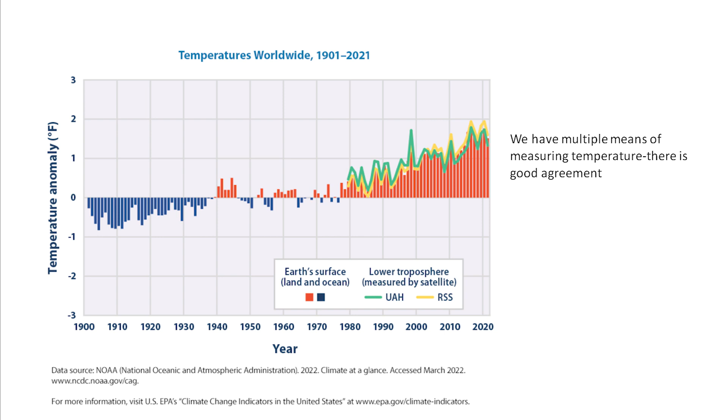Okay, now I'm going to cut out a lot of slides. But anyway, information that we have—this is one we all agree on. We know, and this has great agreement, what's happening to our land and ocean temperature. Pretty much every model, every type of measurement, gets that. This is really reliable information. Let's go to the next chart.

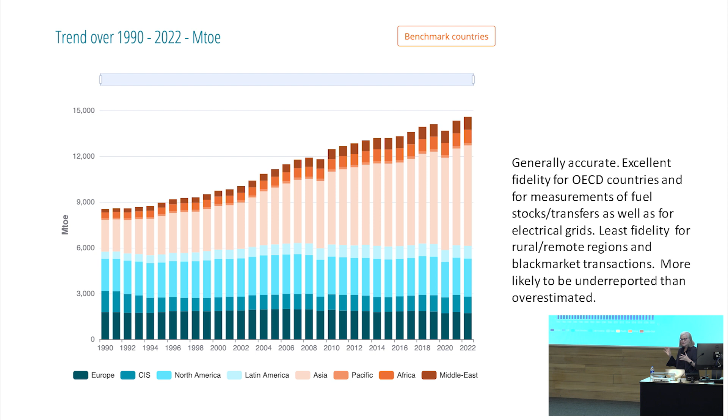This is a chart dealing with actual consumption throughout the world. If you look at it, you realize that in Europe and North America things are relatively flat, but there are stunning increases taking place in Asia, South Asia, and soon to be stunning increases in Africa as well. Pretty accurate in many respects, in terms of understanding where energy flows are—not so great when dealing with areas of the world where we don't have good records, where there are black market transactions, or areas that are rural and remote. But on the whole, we kind of get this type of thing. So what we do know is relatively accurate, but probably underreported.

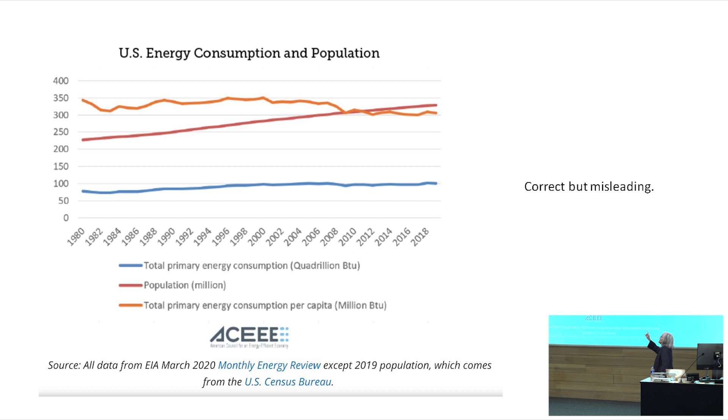But are we really doing something right? Actually, no, we are not. Something right is happening, but it isn't because we're actually reducing the energy we use, even insofar as that measurement shows that. Let me show you why.

It isn't because of the way we're designing buildings. It isn't because of the way we're rethinking the automotive industry. It isn't because of any of those aspects. It is simply that the fuel mix has changed. And yet pretty much every country, this country included, is talking about how well we've been doing—population's going up, but our energy use is not, so we're making big strides. We're not making strides on our end of things. It really is entirely due to this dramatic shift from coal to natural gas.

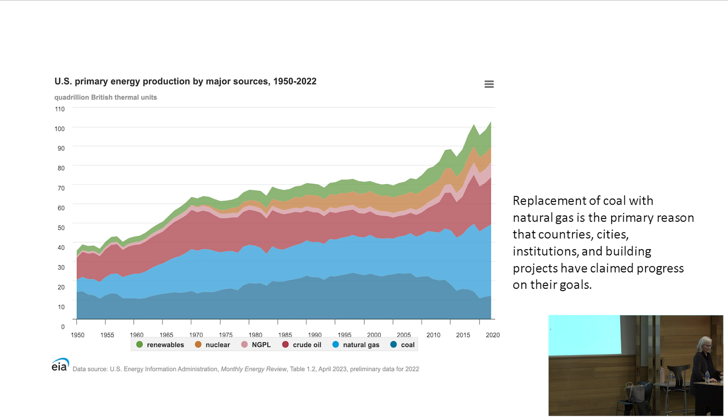A key takeaway is that these improvements are due to fuel mix. The problem we have to worry about is that economies in transition—particularly China, India, and many countries in Africa—are coal-based. So it's actually going to get much worse before things get better. They're not going to have the chance to make the switch to natural gas the way we have in Europe and the US right now.

Another aspect: a study done around 2005 looked at what we've done in building design that's really made a difference. The Department of Energy did an exhaustive study of all their initiatives to see which ones, over their entire lifespan, made a significant difference in the amount of energy used in buildings—$2 billion worth of energy research. They could only find 3 things that made a difference.

The biggest thing—some of us may not remember how refrigerators used to behave, but there was a dramatic change in the design of compressors for refrigerators, leading to advanced refrigerators. You have to be pretty old to remember magnetic ballasts for fluorescent lighting; the switch from magnetic to electronic ballast made a big difference. The other thing, the only one related to building design itself, was going to low emissivity glass. None of the other initiatives showed that they made any difference—only these 3.

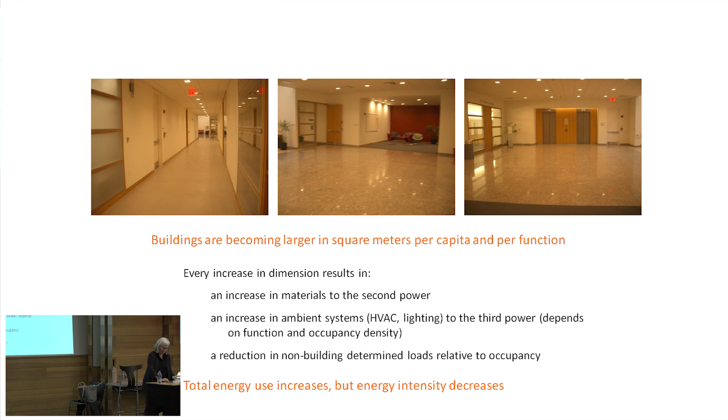This is something I've been talking about for nearly 30 years, every place I can, every part of the world I can. And all I can say is: tiny victories. Finally this year, the Intergovernmental Panel on Climate Change recommended that we change the metric for buildings from energy per square meter to energy per capita. Small move, but finally moving ourselves in the right direction, because we've been looking at the wrong number for years on this. So total energy use goes up, but energy intensity—the energy per square foot—has been decreasing, which has led us astray.

If we think about the fact that much of this kind of construction is also happening throughout the world—we saw with COVID a stemming of the tide, particularly residentially, of buildings getting larger in this country. It'll be very interesting to see with this shift in work arrangements, whether it's hybrid, work from home, whether that's going to have a major impact on our commercial buildings. But what's happening in the rest of the world is that it's building as fast as it can, and as it's building as fast as it can, it's also increasing the space per capita at some of the fastest rates we've ever seen.

I've been following rates in China. The first time I started talking about this, residentially it had gone from 4 square meters a person up to 20 square meters a person. In 2000, it was 26 square meters per person. By 2015, it was already up to 40.8 meters a person. Understand, 4 square meters to 40.8 square meters is a stunning increase.

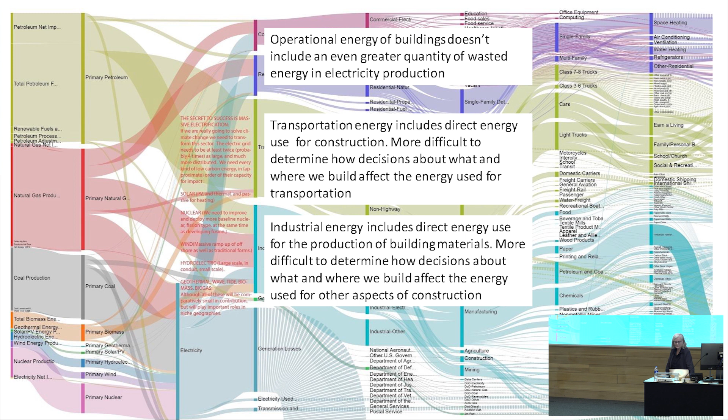And so there's something else that happens as a result of this, because we're only looking at the end parts of this. What do we know the best about in a building? By far we have the best accounting of - if we happen to have an oil-based water heater, a natural gas-based water heater, or a natural gas or oil boiler for heating, we have incredibly accurate information about those uses for space heating and water heating. It's by far the best information we have in the building.

Air conditioning, not so much. Air conditioning involves a myriad of other types of processes not part of our accounting system. But when it comes to heating water and heating of space, particularly if we're using a fossil fuel, we have that spot on. And as a result, we had a lot more focus on thinking about that.

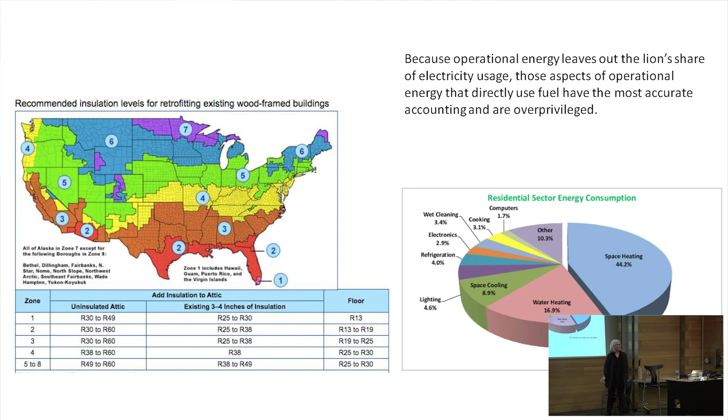So you can even look at this chart over here - space heating... it was just going to be that kind of night. Space heating 44%, water heating 17%, and space cooling 9%. And that includes what comes from lighting. That doesn't make any sense to us, but it makes sense according to our model. It doesn't make sense in terms of how we account for things.

Much of the space cooling aspects belong to another sector - it's not being dealt with right here. And the reason I included this particular graph here, this comes from the Department of Energy.

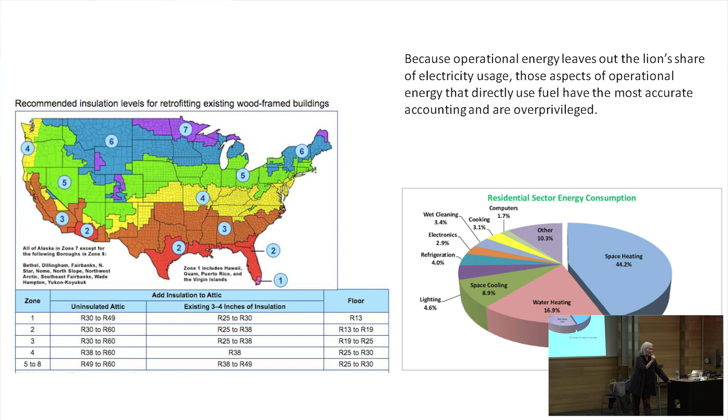It recommends what kind of insulation you should have. Because we've been so focused on thinking that our problem is heating, and insulation is the best way to deal with heating, we have dramatically increased the amount of insulation we expect in buildings. We now expect in Miami, Florida that they should have the same amount of insulation as we used to expect in Maine. Because as we're following what these numbers are, if we're following the fact that heating's the problem, our logic apparently is such that yes, we can improve the conditions in Miami if we just insulate it the same way we've been insulating for Maine.

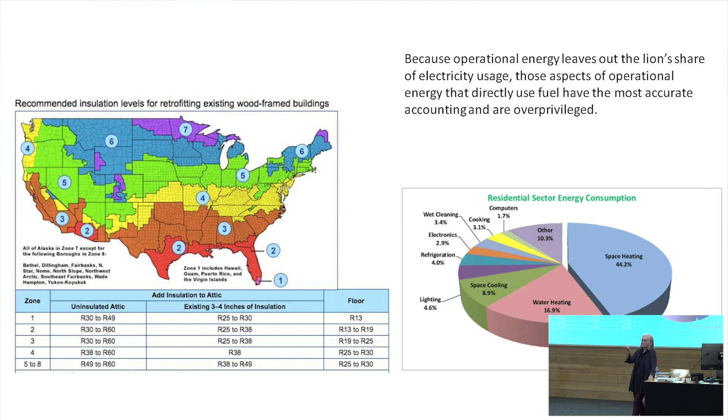We've continued to run down this path. So the next takeaway: codes, standards, and strategies have over-focused on space heating, which is, by the way, the easiest aspect to quantify. We know how to calculate space heating, we know how to account for water heating - we just don't account for the other things very well. And our big concern is not only is space cooling very underaccounted for, it's the area where we're seeing the most rapid growth worldwide - stunning growth in space cooling occurring worldwide.

When it comes to materials, embodied energy, for a long time those of us who worked in the building industry were told it doesn't really matter that much - operational energy is so much larger.

People started to become more and more concerned about embodied energy materials. We started to see software like Tally to help us understand how we dealt with embodied energy in buildings. We've had a lot of focus on working with mass timber in buildings, so there has been some discussion on it.

But it's still something that, in terms of understanding how the overall industry has been impacted by embodied energy, not so much. It was not until the IPCC report in 2014 that the Intergovernmental Panel on Climate Change, in all the years of doing these analyses that we all look to, first thought about embodied energy. So embodied energy shows up in that report, and it's also the first time they put in a chapter on urban settlements.

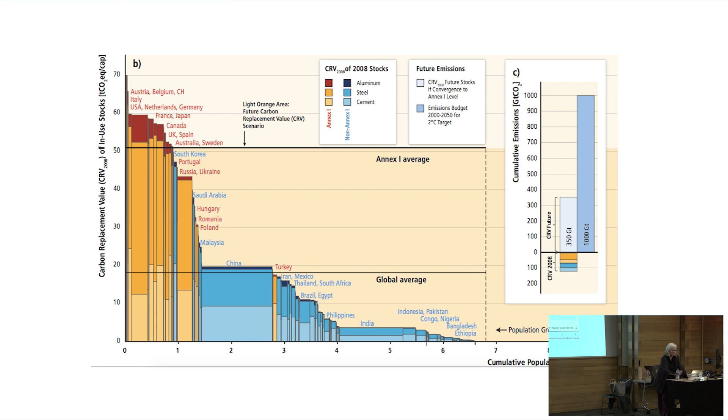What they found, and it's a little hard to read this graph so I'll just explain it, is that they've estimated the embodied energy of buildings and associated construction will be 30% of all carbon emissions by 2040 - the embodied energy. The thing we had neglected for years, what was minor, that we tweaked, that we thought about a little bit - 30%. Now they're thinking differently than we think.

They're thinking about this as an urban condition, which means they're not just thinking about the steel that goes into the structural system of the building. They're thinking about the fact that this building also needs to connect to the sewer system, that it's going to have an associated impact on our water distribution. They're thinking about all of the types of materials we need urbanistically in order to support building, which is the way we're going to have to start thinking about things.

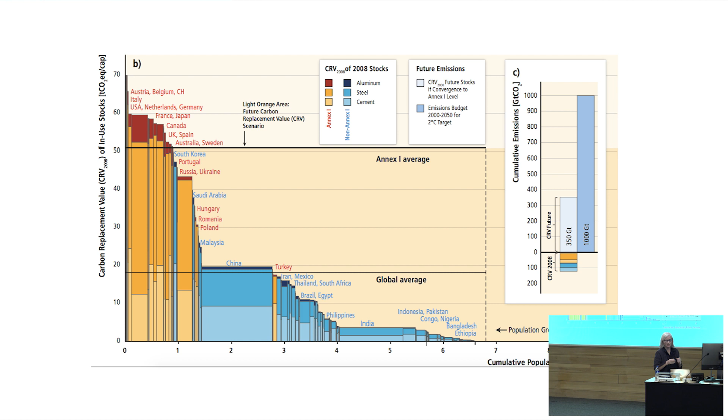We can't start truncating what it is that we do bit by bit and only counting for small parts of things. So key takeaway: while embodied energy for individual buildings and materials has entered our conversation, the much larger embodied energy of associated construction - all the things that come along with building - has not.

Again, the rapid growth and urbanization of the economies in transition are going to dramatically increase concrete usage. Concrete is the most common building material in the world, the one readiest to use. For all the talk about alternative materials, when we're looking at parts of the world trying to industrialize and develop rapidly, it's going to be concrete, which means this is going to get much, much worse.

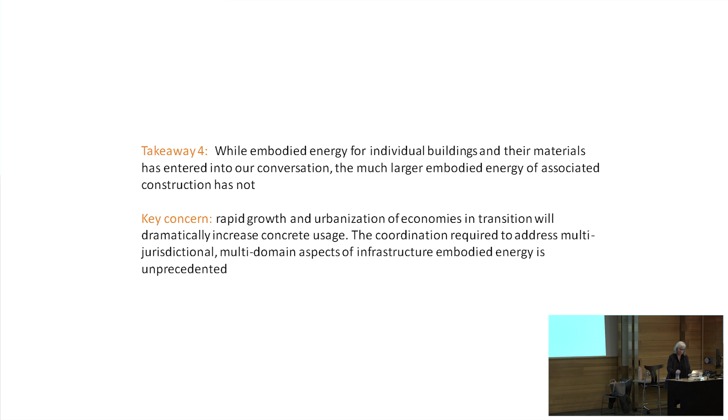Coming to the other aspect that shows up on this, and this one's not going to be popular - I don't know that anything I've said has been popular so far, but this one's really not going to be popular - it's the way that we think about the grid.

For way too long, we've been hyper-focused on things like net zero energy, carbon positive, a whole variety of things like that, where we feel as though as long as we use something that is renewable, or particularly something like photovoltaics, we can use that to erase the energy we're actually consuming. Basically, we are playing junior energy engineers, a building at a time, a bit at a time. I'm showing you here...

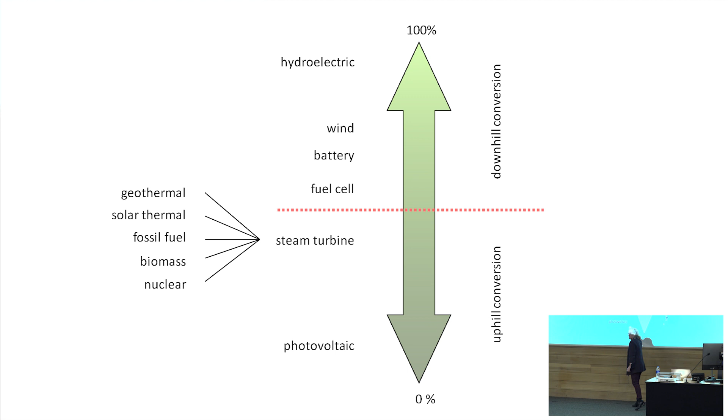We'd be better off if we could start thinking about maybe not making these decisions at a building level, but what if we could start thinking about this at a larger community level? What if we can begin to imagine how we might collectively be able to contribute to things? But as long as we want to make it at a building level, we're stuck with something that actually is probably doing more harm than good.

So the takeaway here: it's so poorly understood by most, and decisions at the building level by customers to add to the grid make little difference. Aging infrastructure, rapidly increasing demand, the net zero energy strategies have distracted us from tackling the most difficult issues and have allowed us to both neglect to focus on actual energy reduction as well as delay investment in the grid.

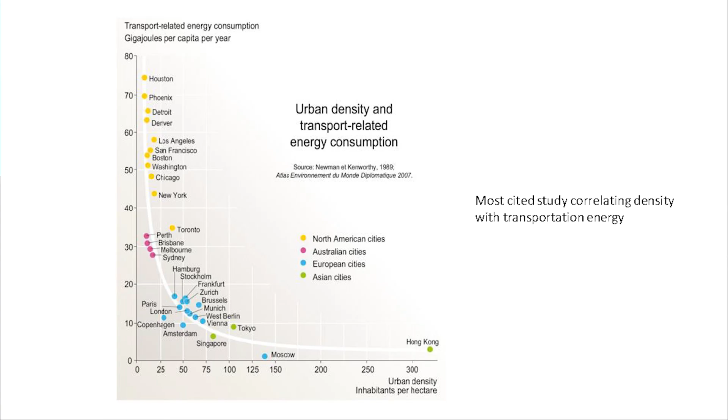So now for a couple of others—all that just comes from looking at the data that we're given. Now this is for some other unquestioned sources that have steered us a bit off course. First one being density. We're going to go to Hong Kong, and we look at Los Angeles right here. This particular paper that was written in the 80s, this image, is the most cited paper dealing with the relationship between density and transportation.

But this paper has been cited every time someone says we need to densify our cities. It's the most common metric, sort of target, directive, or initiative that we see within many types of cities.

Boston, it's been a big driver for many of the decisions being made. LA has been a driver for ADUs, accessory dwelling units. We see this occurring quite a bit.

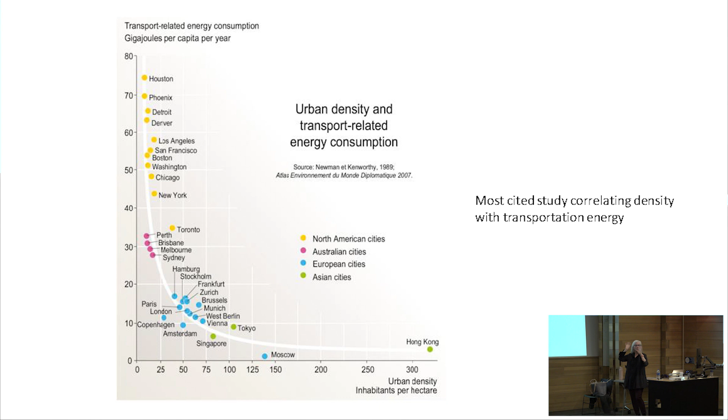So the idea is that if we could just have higher density, we're going to reduce energy. It went from being energy for transportation to energy in general. Part of it is that this is what we've heard for ages. We've all read Jane Jacobs. We've all sort of been concerned about suburbs. And so this fits within our mindset, the fact that higher density means people will live in a way that's less energy intensive.

We know sprawl is a pejorative term. We know that sprawl is bad and that density is the answer.

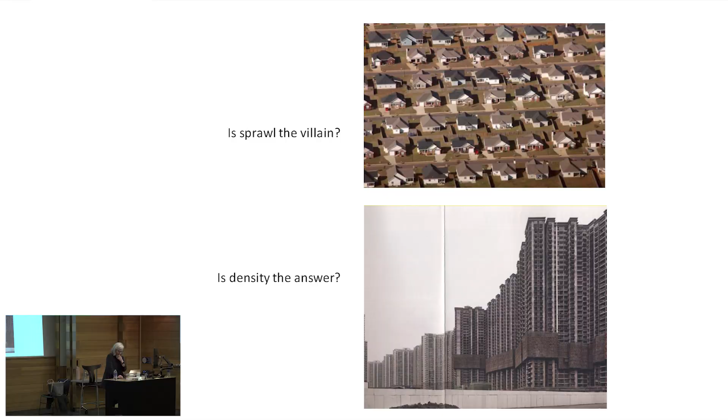So I was on a committee of this planning student who just finished a couple of years ago. This was a student who started his PhD by saying that I need to show people how important density is in a city for us to focus on it. And I said, well, I can't have you as my student, because no good PhD starts off with wanting to prove something. A good PhD topic emerges because you're troubled and don't understand something. But if you want to prove something, you're not going to be objective, you're only going to be looking at data that supports what you want. And darn it, if he didn't do an amazing job at following the data that he got.

He studied 42 cities in the US that had density directives, a way of increasing density. In 41 out of 42 cities, increasing density resulted in things that are obvious: of course increasing density is going to reduce tree canopy, of course increasing density is going to increase impervious surfaces. We get that, that makes sense.

An increase in per capita energy use? No, we didn't quite get that. Some of us did, but most people think that doesn't sound quite right, that why would energy go up if you increase density? This one shook people: an increase in income inequality. But this one's particularly startling: it reduced the use of public transportation.

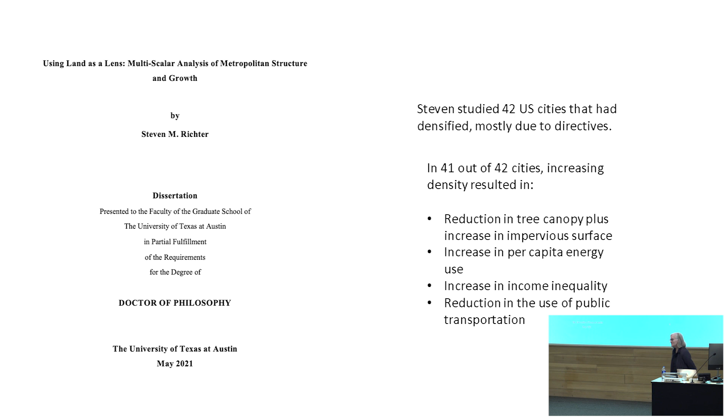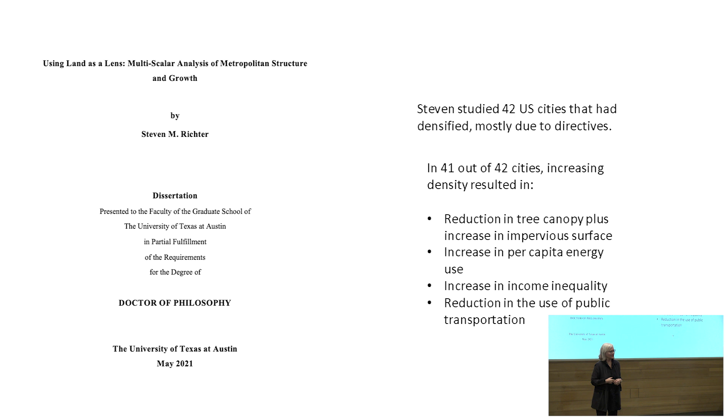So this is what happens when cities in the US are densified. A lot of the densification ends up attracting wealthier residents. Wealthier residents are higher energy users. Wealthier residents, you know, they might be living in high rise, but they're living large in high rise. Wealthier residents don't take public transportation. And then what happens is because wealth goes up, the poorest segments, the poorest part of the population, are forced out of the city beyond the periphery at which public transportation is available. And that's why public transportation use goes down.

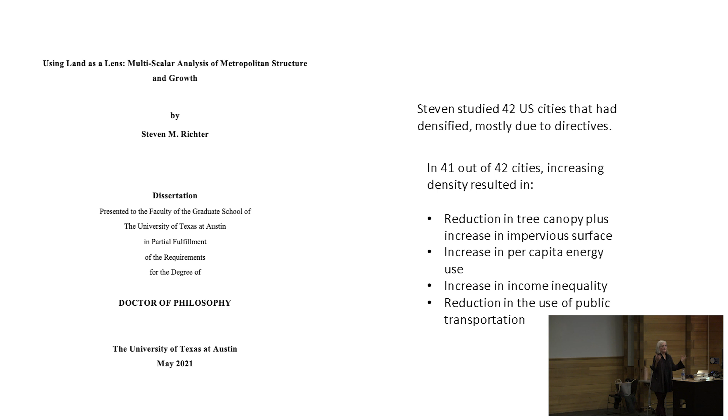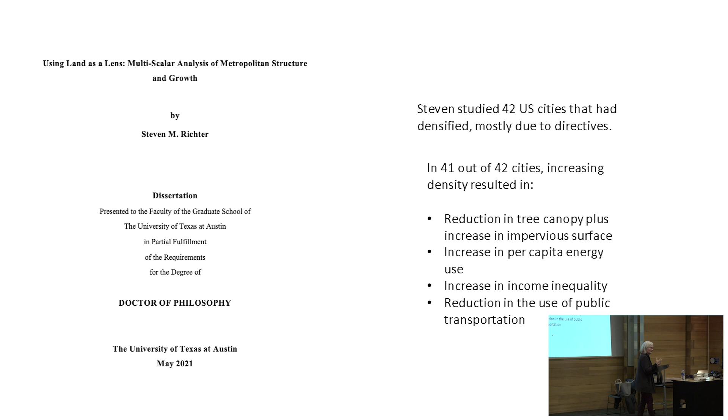None of this fits with our value system. We believe that increasing density should be a good. But this particular study began to reveal that just because it correlates with historic cities, transportation density fits for a European city, that does not mean that if you increase density, you're going to make public transportation show up. It doesn't mean that the people who are increasing density are looking to serve those who need to be served. So the things we might believe in don't necessarily translate directly.

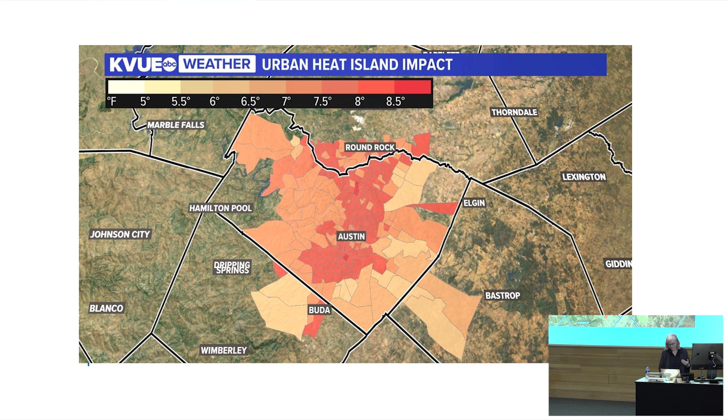And what's interesting about this is while he was doing this, Juliana Felkner on our faculty was looking at urban heat island in Austin. She actually uncovered from a very different angle some similar aspects. One of the things is that those of you who are familiar with Austin know that East Austin is disappearing quickly. The bungalows of East Austin are being replaced by 5/1s as fast as you can get a bulldozer out there. It's stunning to see swaths of these bungalows being torn down as 5/1s come in.

They've heartily been endorsed by the city. They're heartily endorsed because 5/1s, they're more dense. Now obviously, having 5/1s everywhere you look versus bungalows is higher density. So their idea is this is a good thing, this is going to reduce transport energy, people will be living smaller. Well, what happens is that every apartment in a 5/1 is still bigger than a bungalow.

So the bungalows use less energy per capita than any of the 5/1 units use. And then the tree cover disappears, wiped out as you're building the 5/1s. So urban heat island has picked up as well. Even though this was a very different study, not from a planner but from an engineer looking at these different aspects, it's starting to reveal some of the same information. This automatic assumption that density is going to be the solution is telling us we don't quite understand what's going on.

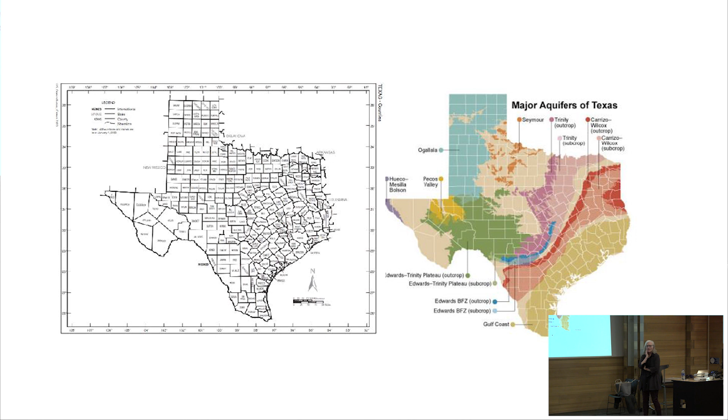And then I think the study that we're really waiting to do, and really needs to happen, is understanding density in relationship to water. Something particularly of concern here in Texas, as well as much of the southwestern United States, is what does increasing density do to our water resources?

So a key takeaway from this: increasing density has been put forward as an answer, a solution to affordability, accessibility, sustainability. But correlation, just because it correlates in a few areas, is not the same thing as causation. Density does not cause those things, it just happens to correlate in certain examples.

We've overinflated its relationship. I would put forth that density is parametric. It's not something we're trying to strive for higher density, but think about it as parametric—there will be times when increasing density will facilitate certain things, where strategically done density can help. There are probably locations where increasing density is just going to do harm. We need to understand it as parametric, what those relationships actually are, as opposed to a blanket idea about it.

But then if we start to think about this worldwide, when we're thinking about increasing density in the US, we're still not seeing the kind of density increases that we're seeing in much of the world. When we start to think about where the fastest growth is taking place—Asia, South Asia, and Africa—we're not just talking about density in relationship to transportation use, we're thinking about stunning increases in density. We haven't even come close to grappling with what that is going to do, both for lives, livelihood, resources, all of that.

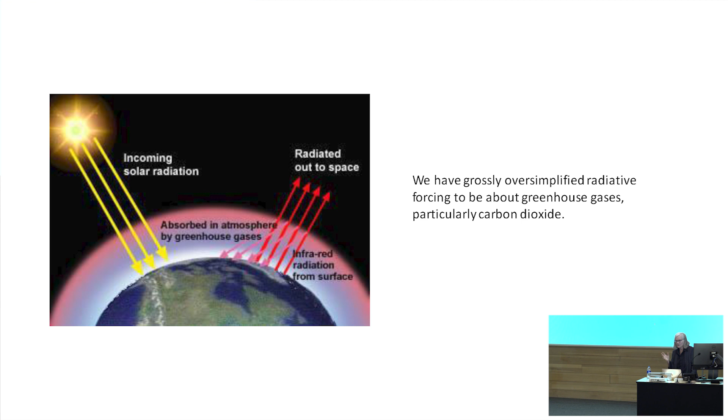Two key aspects are neglected when we focus on carbon: albedo—we've been talking more about albedo, we've started to see a lot of initiatives, and I see this every time I'm in a plane, which is actually a bad environmental thing to do, so I apologize for that—but every time I'm in a plane, I see an incredible expansion in white roofs, a way of dealing with albedo. So it's something we've been talking about. We're not great at looking at albedo at large, particularly for urban areas, but at least we're thinking about it at the building level.

The one thing we're not thinking about, the one thing neglected through all of these different things, are our thermal emissions. What are our thermal emissions? Energy and efficiency—I gave you that chart before that talked about high efficiency and low efficiency. Low efficiency conversions emit heat, they emit lots of heat. That's what's being trapped by the greenhouse gases. And many of our ways of thinking, like 'I'm doing this to eliminate carbon,' at the same time, I'm just going to increase the amount of heat that I'm generating.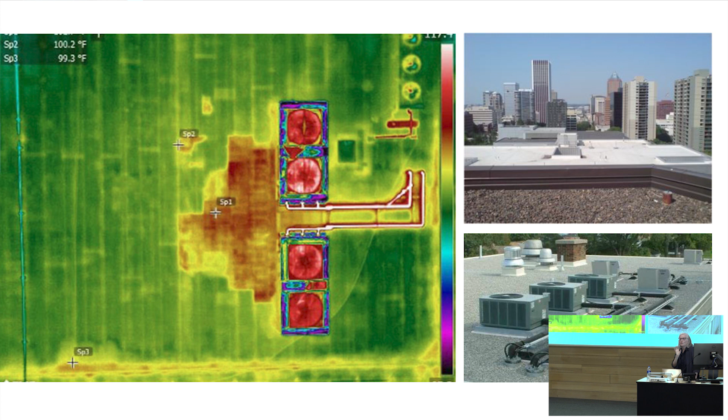Energy conversion creates heat. That heat is what's being transmitted, what's being trapped there. Nobody's quantifying this—it's come close. There's been some recent work at NASA where they're first starting to track what these thermal emissions are. I think this is going to be the most exciting area for us to work on and really get a good handle on.

So we can explain that you might think that by having a LEED certified 8,000 square foot house that you slap some photovoltaics on, that you've done good. It takes 3 times as much energy to move heat out of a space than it does to heat it. It's a stunning amount of heat that we are moving out of our spaces. The more space that we cool, the more need that we have for cooling, with all of these types of emissions that we're heating everything up with.

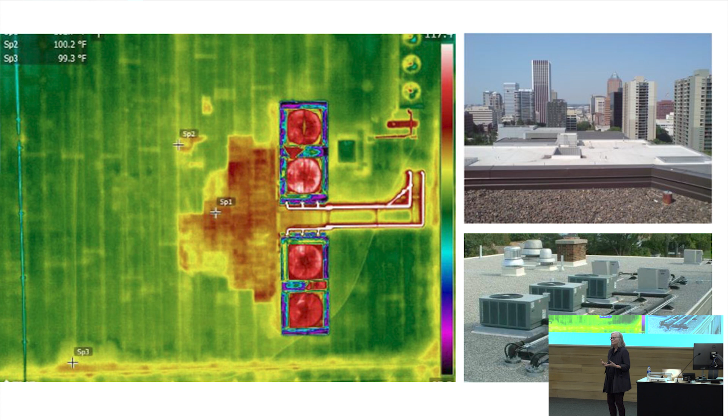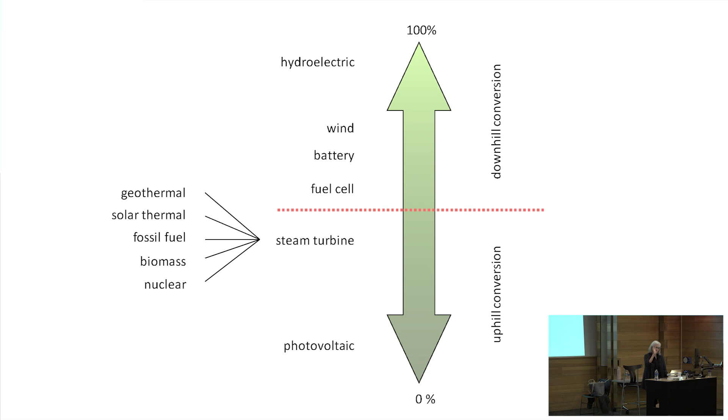We understand it when we think about urban heat island—it's one of the main contributors to urban heat island. We don't understand it when we think about the context of the world. And it takes us back to this particular thing again: anything that's not 100% efficient—and it's impossible for anything to be 100% efficient—produces heat, heat, heat, heat. When we start thinking about cooling, the most inefficient process we can do, it's heat, heat, heat—3 times as much coming out from that.

I'm going to skip through these, but this just shows all the different kinds of energy conversions and where they are. One of the things I've always encouraged students to do is, if you think about what we really need, then there's actually different categories of conversions. We want to go to the most efficient conversion for the thing that we need.

Really, the only things that need alternating current are refrigeration and compressor air conditioning—things that deal with rotation really prefer alternating current. But alternating current, our grid, is like the universal donor in blood. It's high quality energy, we can use it for everything. So we use it for everything.

The fact that we're taking—I'll go back to the photovoltaic example—the fact that we're spending so much energy, creating so much heat, to work with a photovoltaic that will integrate into the grid. First of all, photovoltaics don't make alternating current, they make direct current, but to integrate it back into the grid, we're having to lose another 25% to make it fit.

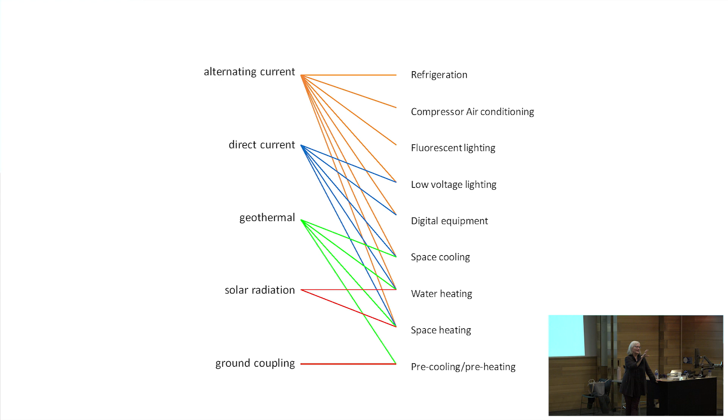When actually we could be using solar energy to heat water—that's a process about as efficient as you can get if you're dealing with solar energy. So the idea of this particular chart is: get the lowest quality of energy in terms of the exchange, the most efficient energy for the most efficient task.

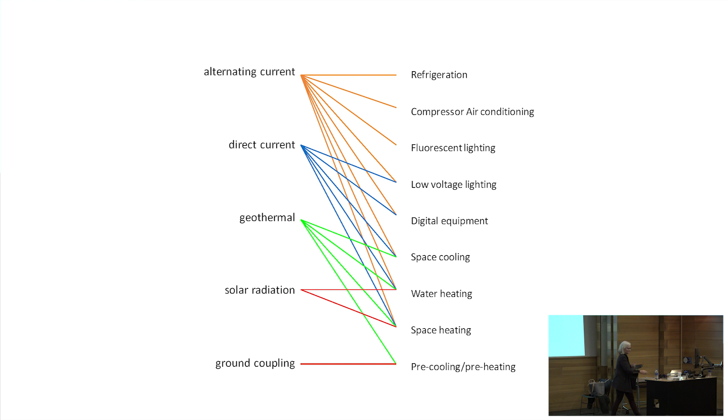Alternating current can do everything. Direct current can do quite a bit—fuel cells, batteries, photovoltaics all make direct current. Geothermal energy, you can get space cooling, water heating, space heating; solar radiation directly used is fantastic for water heating and space heating; ground coupling is another source.

We should be working from here up. Instead, we don't—we just worry about alternating current. Doesn't matter how inefficient it is, we can use it for everything.

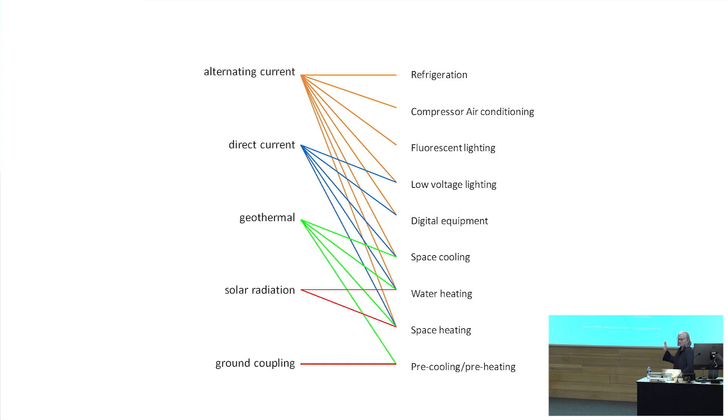So, takeaway number 7—I have one more takeaway, and then we're going to be done.

Because we've been so focused on carbon, it's prevented us from addressing a significant building contribution to radiative forcing, and that's heat as a thermodynamic penalty from all energy conversions. Here's what we really need to be concerned about: there's a feedback loop between the heat we emit by cooling, the rapid increase in cooling technologies we're adding throughout the world, and their contribution to urban heat island. They keep feeding back on themselves, accelerating the heating of our planet with this type of approach.

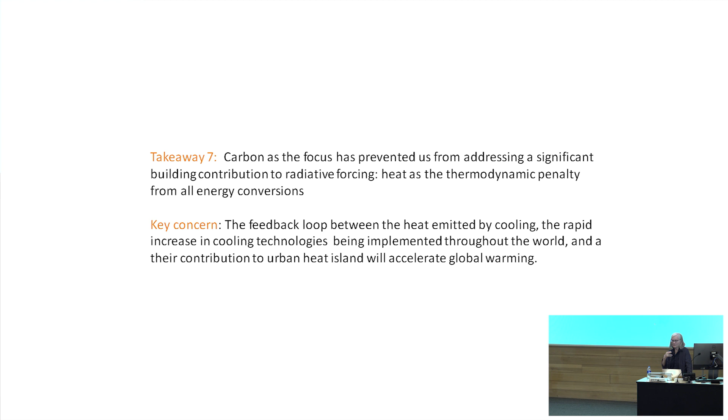I'm going to give you one quick example that I always do with first-year students. After I had that strange experience with the two professors at Harvard, I waited a couple of months and took this example to them to see how they would respond. The first time I took the example it was abstract; this time I'm explaining it to you as I explained it to them.

I start with a box. It's a 10-foot by 10-foot by 10-foot box, a perfect cube, and it's adiabatic. In case you don't know, that means it's perfectly insulated, a completely insulated box. The idea is I put something in this box, so whatever heat is emitted by its energy conversion will only heat the air, not the walls, because they're adiabatic. This gives us a real sense of just how much heat every single energy conversion in a building gives off. So first thing to put in there, what happens at 70 degrees?

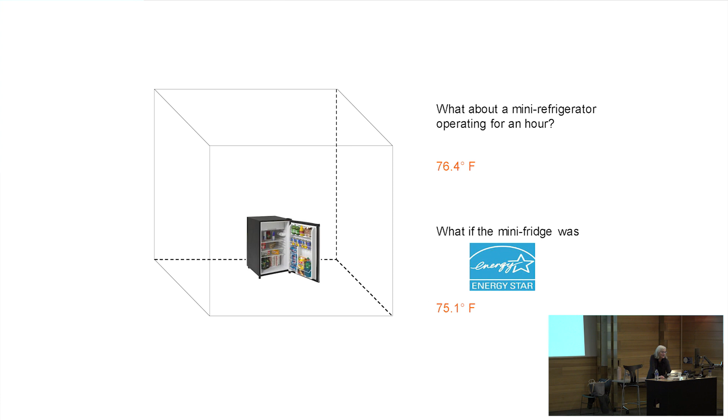I left a 15-inch MacBook Air in sleep mode on. The temperature goes up a little bit, not much. What if it was idle but the display was on? Goes up a little more. What if I put a mini refrigerator in there for an hour? Temperature goes up to 76 degrees. What if it was Energy Star rated? Better, 75 degrees. What about a desk lamp with a 60-watt incandescent bulb? Yeah, 81 degrees. What if I put an LED in there instead? Better, 72. What about a person sitting for an hour? 90 degrees. What if they were dancing?

176 degrees. If you want to think about this, there's Sarah Jane Pell, an amazing performance artist interested in environmental contamination and what's happening to the environment of the human body. Sarah and I were having dinner one night and she was telling me about an installation where she's sealed inside a sphere to see how long it would take before the carbon dioxide she exhaled depleted the oxygen in the space. She said she was going to do it until she faded, with people standing by. She said she's never been able to complete it because the heat builds up in there so fast, much faster than the oxygen is lost. It never occurred to her that her body would create so much heat.

How much time before it was unbearable inside of this? And understand, this is inside a building, we're not putting this out in the sun. 10 minutes. How much heat was coming off of her body in this entire space that had to be contained within the shell? 10 minutes.

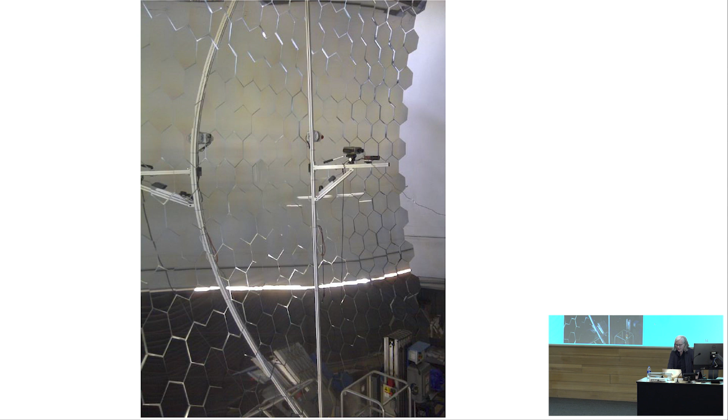Thermal inertia, straightforward thermal inertia. This might give another example - not calculated, but from experience. I spent some time at a research facility in Cuernavaca, Mexico, where most of their focus is on solar energy. This is a parabolic collector - my shoulder comes up to about the middle point, so you can get a sense it's about room sized. This is what it could do by concentrating solar energy: cut metal, cut stone, cut a hole in brick.

There's a stunning amount of energy within the sun that we don't harness well at all. We harness it in the most inefficient way possible. It would be incredible if we could use it for hot water heating, many ways for hot water heating. But instead, somehow we think it's a good thing to have lots of sun coming into our buildings.

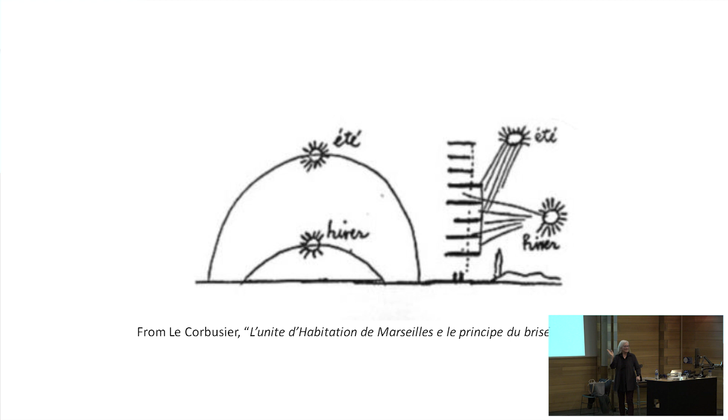We've all studied terms like l'été, l'hiver, summer, winter. This produces the image of, hey, in the wintertime we want full sun coming in, and in the summertime we don't want so much. But it doesn't matter to us that this shows exactly two seconds of the year - one second at the winter solstice, one second at the summer solstice. I sit on a lot of AIA juries, and they're all required to do sustainability diagrams now - everyone includes an image like this, one example, one second of the year, of how their facade design works.

What we do with our buildings - we don't realize how much heat we're putting into them, because all of the building materials are absorbing that heat, and we've got air conditioning systems carrying it out for us. It's a stunning amount that we do.

Also, side note - our field really doesn't understand the sun, how solar energy works. If I were to think about how I use solar energy, I would start thinking about it from a district standpoint - how communities or neighborhoods could share in terms of solar hot water heating. There's a lot of things we could be thinking about. We're going to have to start thinking about energy systems beyond the boundary of a house - what works at different scales, what other types of things we have to include.